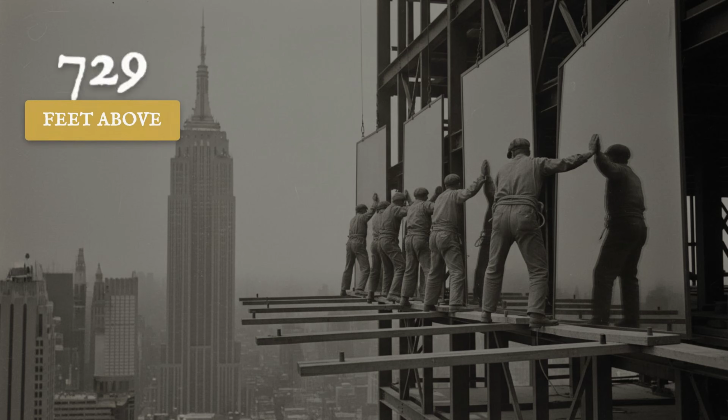In the 1930s New York, men dangled from wooden planks 729 feet above Fifth Avenue, wrestling sheets of glass that weighed more than 2 grown men. A single pane for the Empire State Building's upper floors tipped the scales at 300 pounds, yet the crews hoisting them worked without harnesses, nets, or any equipment we'd recognize as safety gear today. One slip meant a fall through thin air with nothing to break it but the pavement below.

These weren't daredevils seeking thrills, they were window installers, craftsmen whose job demanded they handle fragile, expensive glass in conditions that would paralyze most people with fear. Why did they accept such staggering risk? And how did an entire industry operate this way, one pane at a time, without modern protection? The answer reveals not just courage, but a system where speed, skill, and economics collided at deadly heights.

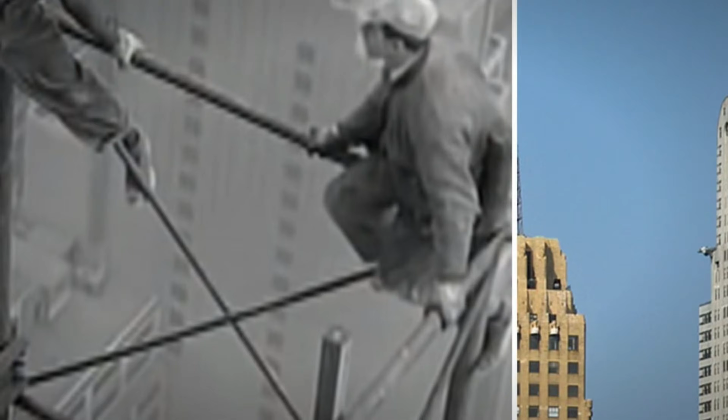The skyscraper boom of the late 1920s and early 1930s transformed American cities into forests of steel and glass. The Empire State Building, completed in 1931, demanded more than 6,500 windows. The Chrysler Building, finished just a year earlier, required thousands more. Each tower represented a new challenge, how to seal buildings against wind and weather while letting in light through enormous expanses of glass. Window installation became its own specialized trade, distinct from the ironworkers who assembled the frames or the masons who laid brick facades.

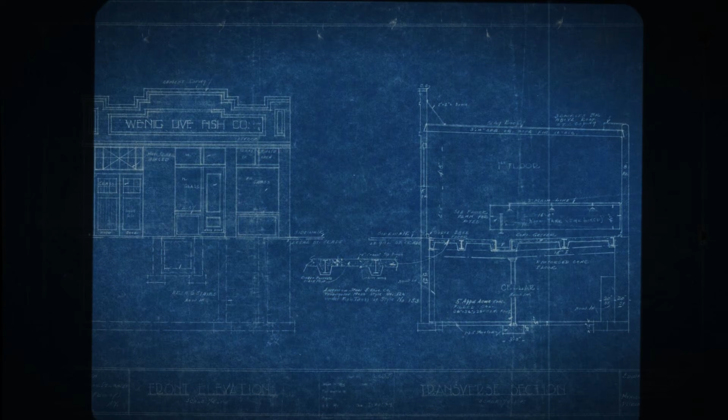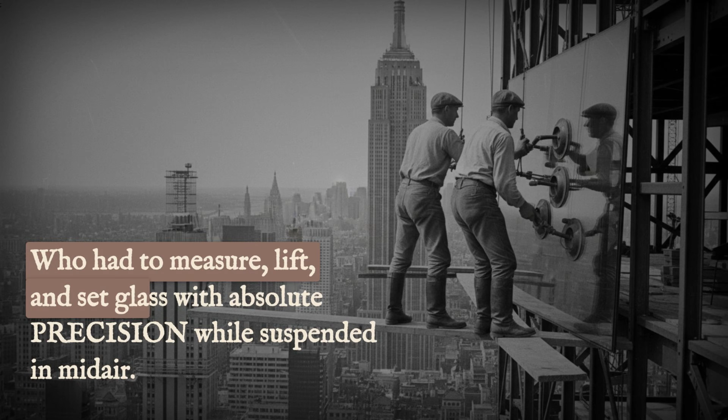These glaziers worked on a precise timeline, moving floor by floor as the steel skeleton rose. Developers pushed for speed. Every day of delay meant lost rental income. Insurance companies demanded weather-tight buildings before winter storms arrived. The pressure funneled down to the men on the planks who had to measure, lift, and set glass with absolute precision while suspended in midair.

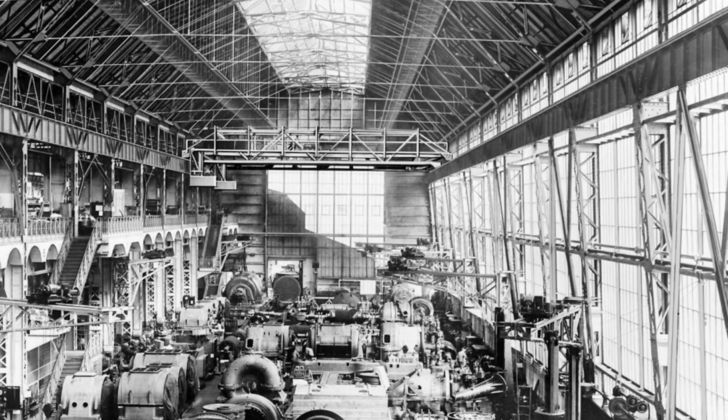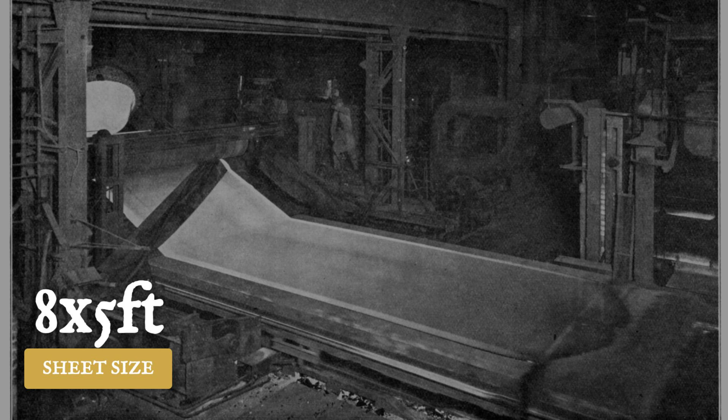The glass itself was revolutionary for its time. Plate glass manufacturing had advanced dramatically since the early 1900s, when most window panes were small and relatively light. By 1930, factories could produce sheets measuring 8 feet tall and 5 feet wide, smooth enough to eliminate distortion and thick enough to withstand wind pressure at extreme heights.

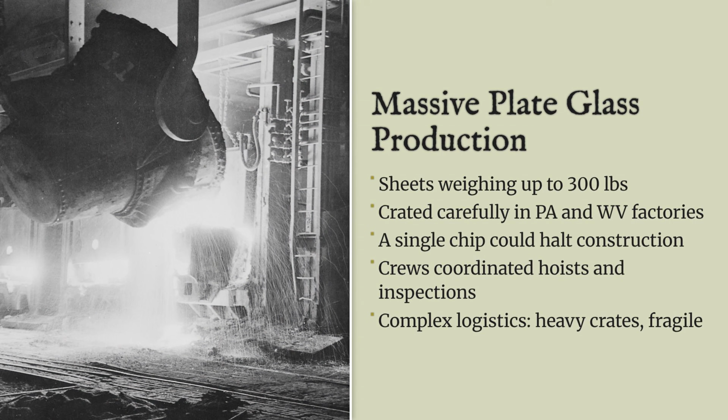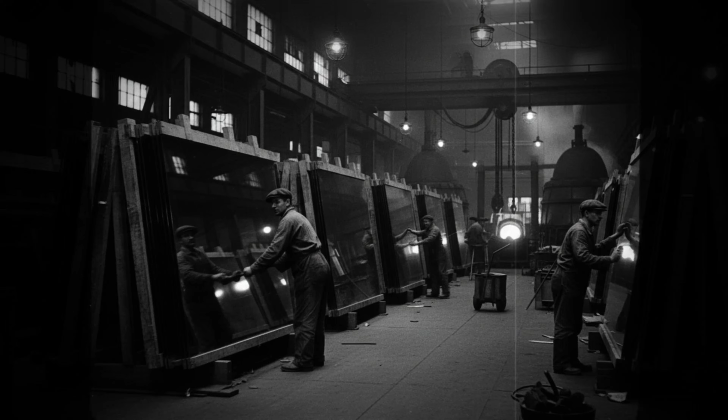The grinding and polishing method produced these massive panes. Molten glass was poured onto large tables, allowed to cool, then ground flat with progressively finer abrasives before final polishing. This process created optically clear glass free from the waves and distortions common in earlier window panes. The factories that supplied New York's building boom operated around the clock, processing sheets that would eventually hang hundreds of feet above city streets. But size came with weight.

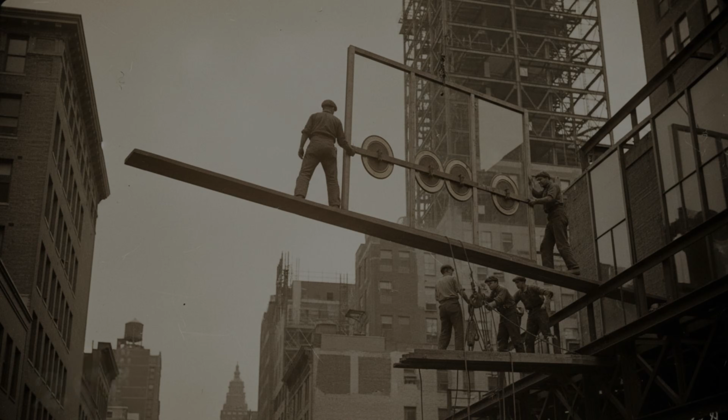A standard office window pane ranged between 250 and 350 pounds, depending on thickness and dimensions. Some specialty panes for lobby windows exceeded 500 pounds. Transport from factory to construction site was its own challenge. Glass couldn't simply be stacked like lumber or bundled like steel beams. Each sheet arrived by truck from Pennsylvania or West Virginia, carefully crated in wooden frames built to precise dimensions and packed with sawdust and straw to cushion against road vibration. A single hard jolt could crack multiple panes, turning a profitable delivery into a total loss. Trucks carrying glass moved slowly, avoiding rough roads and sudden stops.

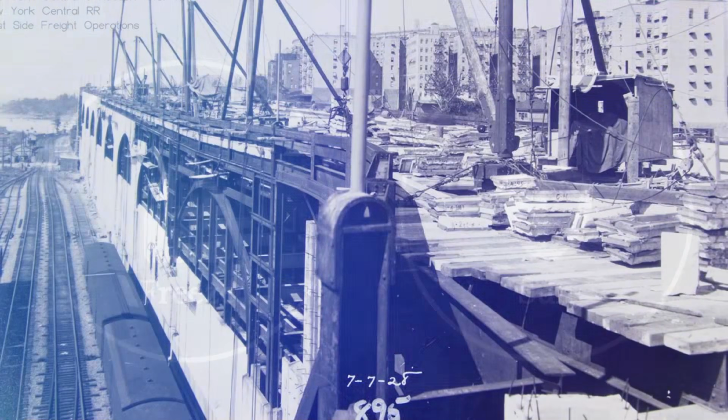At the construction site, storage demanded equal care. Rain could seep into crates and cause spotting, freezing temperatures could crack panes through expansion of trapped moisture, and direct sunlight could overheat glass stored in tight packing. Large projects required dedicated ground floor storage spaces where glass could be kept dry and accessible for hoisting. Workers uncrated each sheet on site, inspecting for cracks or flaws that could cause it to shatter under stress. A single damaged pane discovered after installation could mean dismantling scaffolding and repeating hours of work.

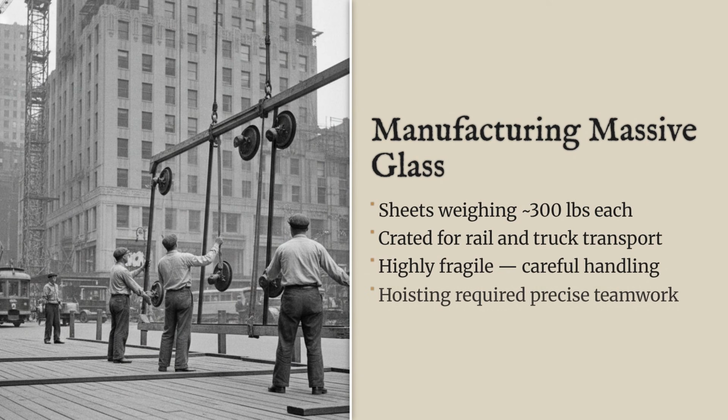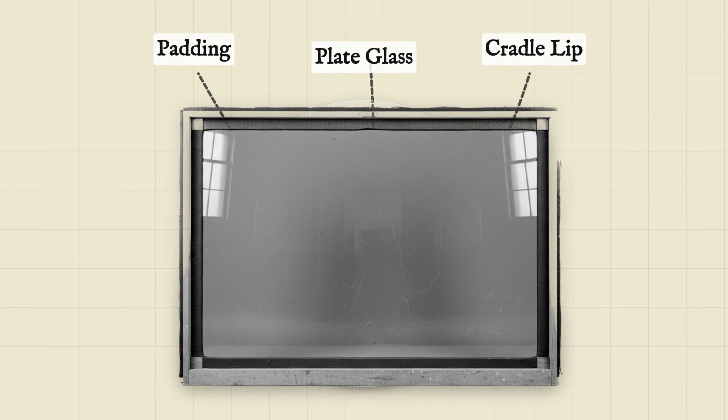Moving these massive sheets required coordination between ground crews, hoist operators, and the glaziers themselves. Hoists lifted the glass from street to working floor, threading between steel beams and temporary construction platforms. Unlike steel beams, which could be dropped a few inches without catastrophic damage, these massive panes demanded gentleness at every stage. The panes rode in wooden cradles with padded edges designed to cushion them against sudden movements. Hoist operators, using the same steam-powered derricks that lifted steel, learned to start and stop gradually, avoiding the sudden jerks acceptable when moving iron.

Signalmen directed each lift with hand gestures, but with even less margin for error. A swinging load could crack a pane worth several weeks of a worker's wages. At the installation floor, the real challenge began.

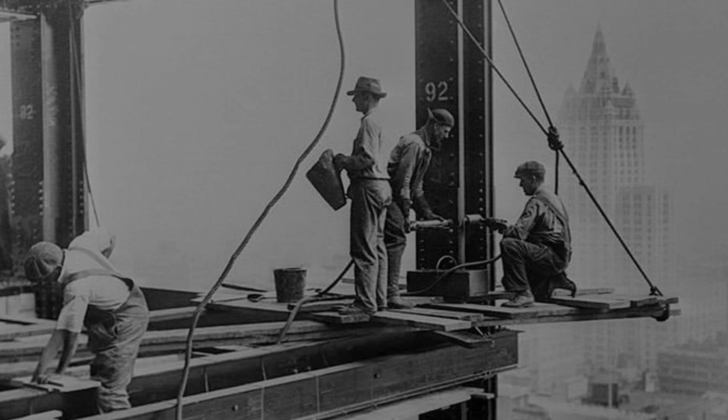Glaziers worked from wooden planks suspended by ropes or cables, positioned just outside the building's frame. These planks, called scaffolds, measured roughly 2 feet wide and extended 12 to 16 feet in length. Multiple planks would be lashed together to create a working platform along an entire floor's perimeter.

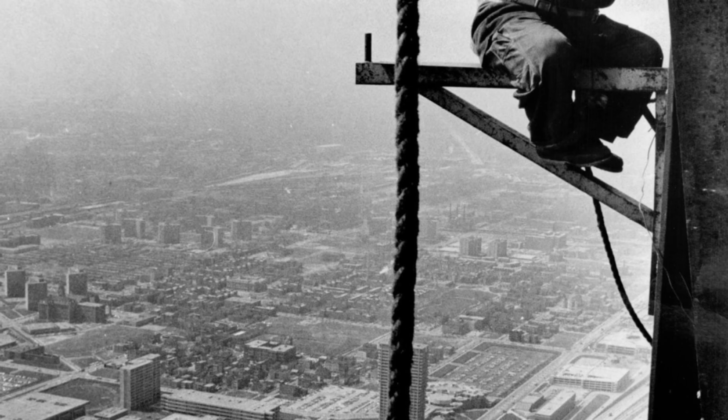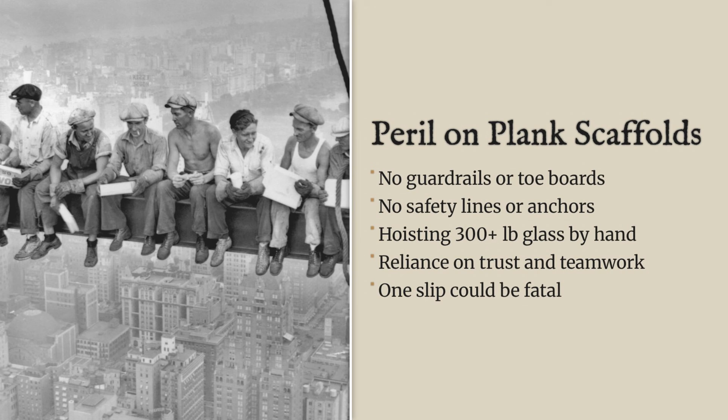The scaffold hung from the steel frame above, secured by rope loops tied around beams or hooked to temporary anchor points. There were no guardrails, no toe boards to prevent tools from rolling off, and no safety lines connecting workers to anything solid. The scaffold system evolved as buildings grew taller and construction companies learned from accidents.

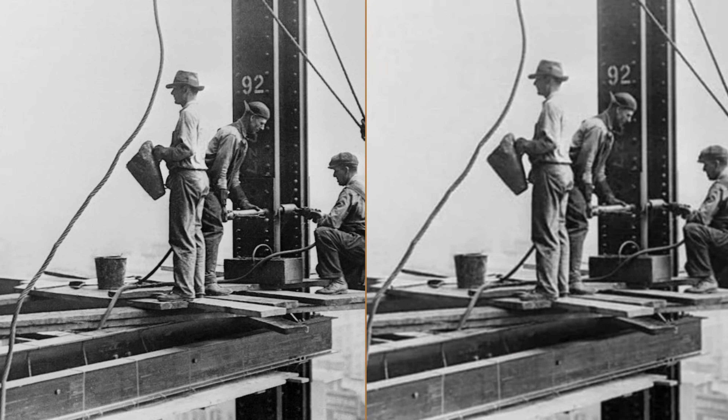Early scaffolds were simply wooden planks roped to whatever anchor point was convenient. By 1930, some contractors used wire cable instead of hemp rope, improving strength and reliability. Metal brackets bolted to the building's frame provided more secure anchor points than rope loops, though installation still depended on the skill and judgment of the rigging crew.

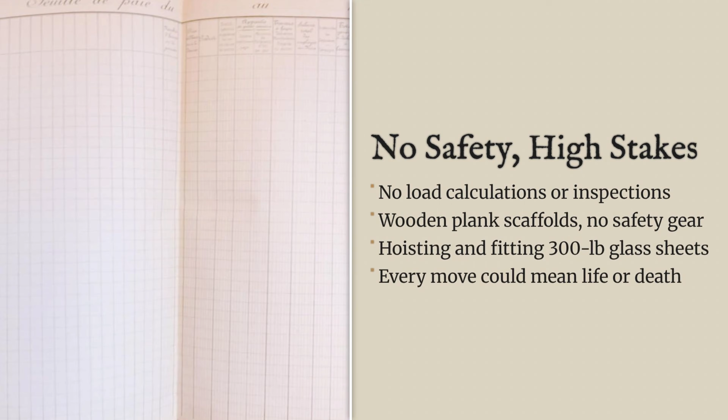Despite these improvements, the scaffolds remained fundamentally temporary structures with minimal engineering. There were no load calculations, no inspection requirements, and no standards for how much weight a given setup could safely hold. A typical scaffold might support 3 workers, their tools, and a massive pane, easily exceeding half a ton of total load. The anchor points had to hold all this weight, plus the dynamic forces of men moving around and wind pushing against the structure.

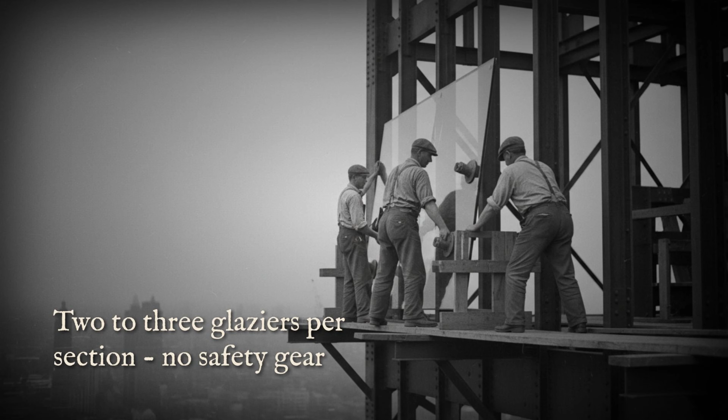2 or 3 glaziers typically worked together on each section, with one man acting as the lead installer and the others assisting with positioning and securing the glass. They wore leather gloves to protect their hands from sharp edges, but the gloves had to be thin enough to maintain grip and feel. Heavy winter gloves were too clumsy for the fine adjustments needed to seat a pane properly in its frame. Canvas aprons protected clothing and provided pockets for tools, such as putty knives, glazing points, and small hammers, but offered no protection in a fall.

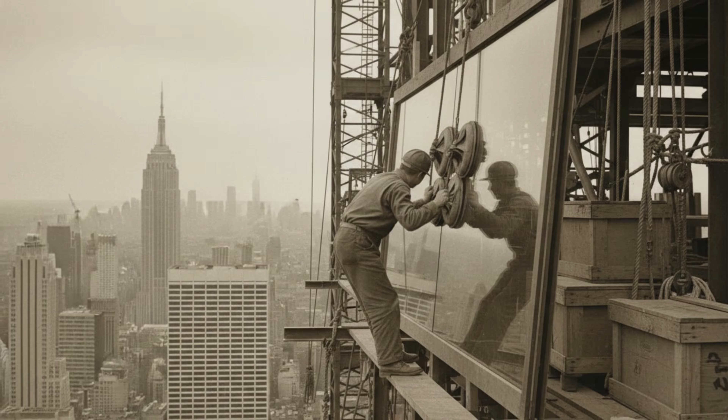The technique for lifting and setting a pane was part strength, part leverage, and part timing. The glass arrived at the scaffold's edge in its wooden cradle, positioned by the hoist crew. The glaziers would grip the sheet by its edges, using suction cups in some cases for the largest panes. These cups, made of leather or rubber with hand pumps to create vacuum, gave the men something to hold beyond just the glass edge itself. But suction cups could fail if the glass was wet, dirty, or if the seal broke under strain.

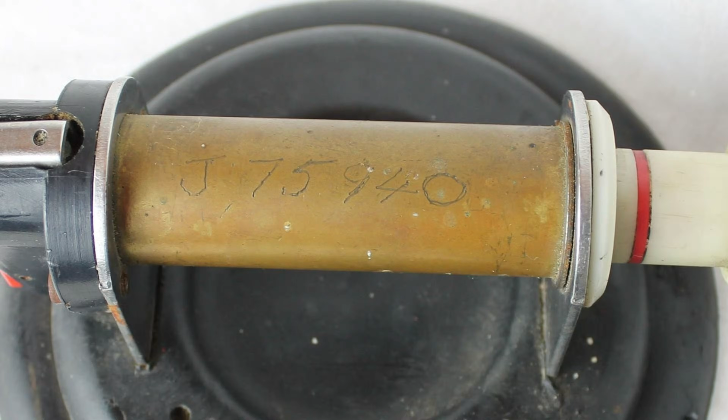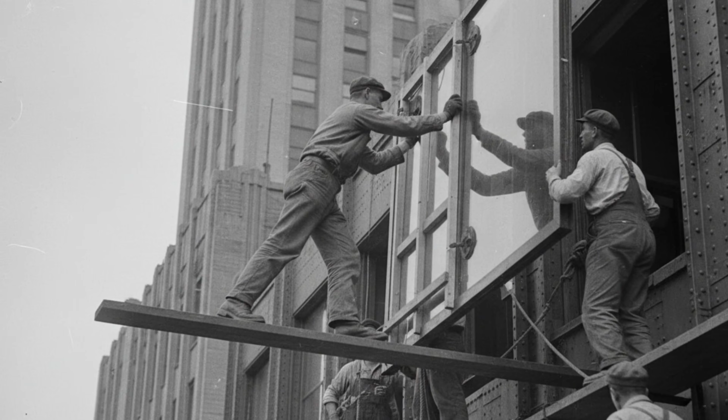Working together, the crew would tilt the pane upright, pivoting it on one edge while supporting it from multiple points. The lead glazier positioned himself at what would become the top of the window once installed, while his partners steadied the bottom and sides. They moved in unison, walking the glass across the scaffold toward the window opening. Every step had to be coordinated. One man moving too quickly or losing his grip could send the pane crashing down, or worse, toppling sideways and taking the whole crew with it off the plank.

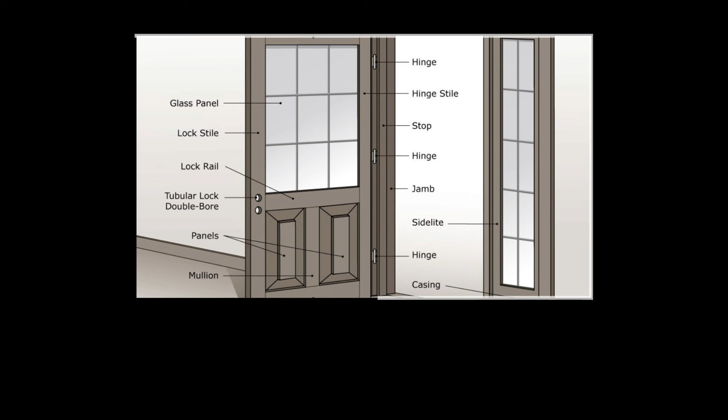Once positioned at the window opening, the real test of skill began. The steel frame around each window had been set with precise measurements, but construction tolerances meant that every opening was slightly different. The glaziers had to ease the heavy sheet into the frame's rabbets, the L-shaped grooves that would hold the glass, while checking for fit on all 4 sides. Too tight and the glass would bind or crack under pressure. Too loose and wind would whistle through gaps, or worse, the pane could work free and fall.

The crew tilted the glass to slide the top edge in first, then carefully lowered it into place, checking alignment as they went. One man held the full weight at an angle while another tapped the bottom edge with a rubber mallet, adjusting position by fractions of an inch. A third worker might be reaching around the frame from inside the building, ready to place temporary wooden wedges to hold the glass once it's seated properly. The entire operation happened while balanced on a 2-foot-wide plank with nothing between the workers and a fatal drop.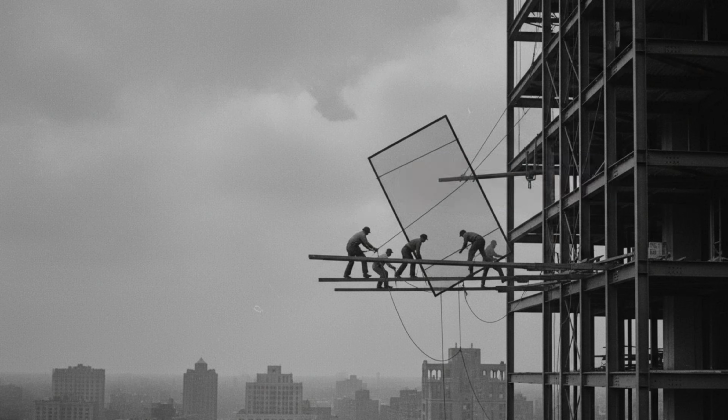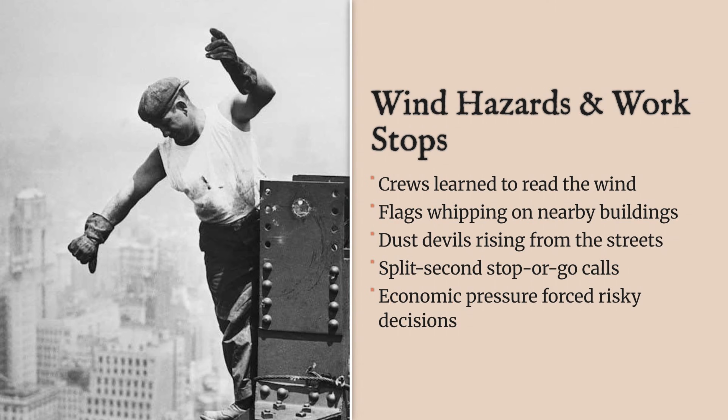Wind was the constant enemy. At heights above 500 feet, gusts could reach 40 miles per hour on an otherwise calm day. A sudden blast could catch a pane being maneuvered into place, turning it into a sail that either shattered against the frame or pulled the workers off balance. Crews learned to read the wind, watching for telltale signs, flags whipping on nearby buildings, dust devils rising from the streets below, or the feel of pressure building before a gust hit.

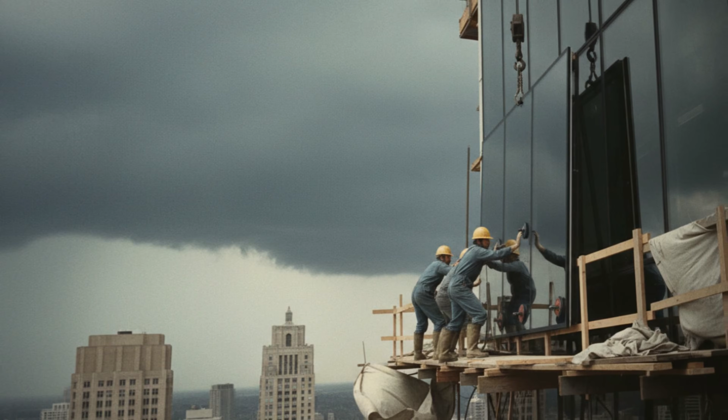On particularly windy days, work stopped. Foremen made the call, weighing the cost of delays against the certainty of damaged glass and injured men. But the pressure to keep moving was intense. Contractors faced penalties for late completion, and those costs cascaded down to the workers in the form of reduced hours or outright layoffs. Some crews took chances they knew were foolish, gambling that they could set just one more pane before the weather turned worse.

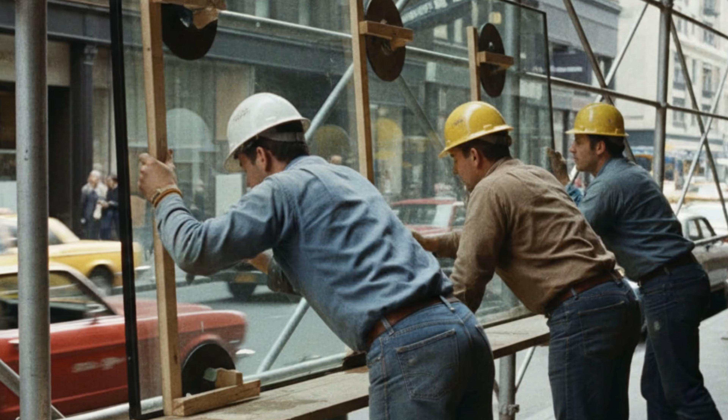Once a pane was seated in its frame, the securing process began. Glazing points, small triangular pieces of metal, were driven into the wooden frame around the glass perimeter, holding it in place while glazing compound cured. The compound, a putty-like mixture of linseed oil and chalk, was worked into the gap between glass and frame with putty knives, creating a weather-tight seal. This finishing work required reaching around the glass from the outside, often while leaning far out over the plank to reach the frame's edges.

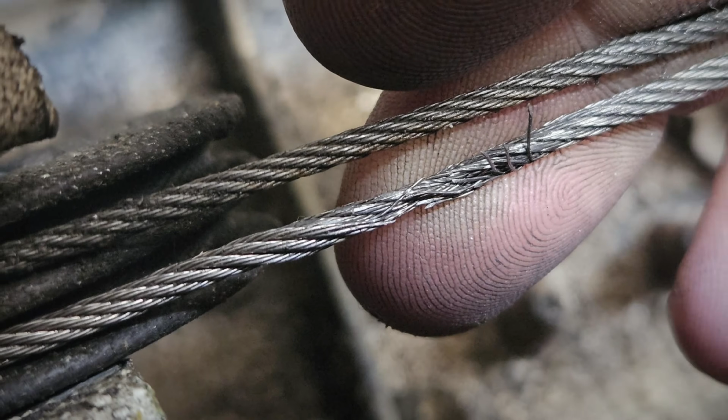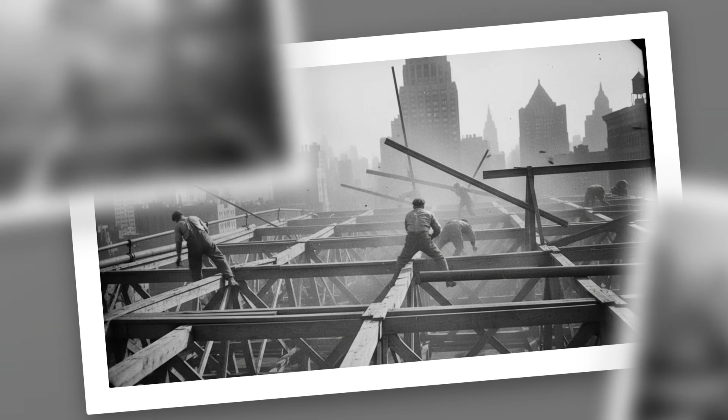Rigging failures killed workers regularly. A rope frayed by rubbing against a steel edge could part without warning. An anchor bolt over-torqued during installation might crack the steel beneath, creating a hidden weakness that gave way under load days later. Some failures were catastrophic, with entire scaffold sections dropping and taking everyone on them to their deaths. Others were near misses, planks tilting suddenly, dumping tools and materials while workers clung to ropes or grabbed for the building frame.

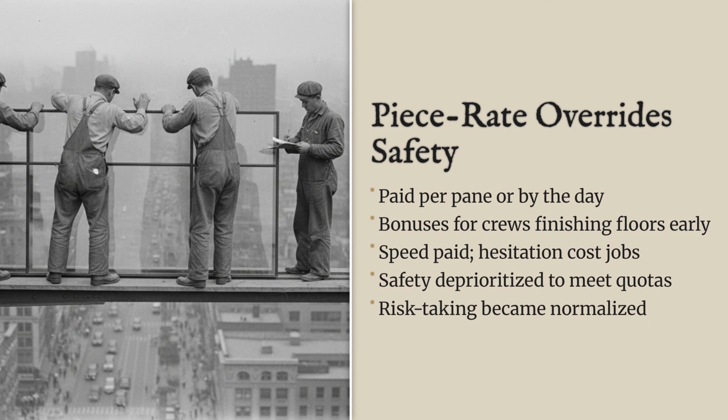The economics of window installation created pressure that overwhelmed caution. Glaziers were typically paid by the pane or by the day, with bonuses for crews that completed floors ahead of schedule. This piece rate system incentivized speed over safety. A crew that took time to double-check rigging or wait out marginal weather earned less than one willing to push through. The men who hesitated, who voiced concerns about conditions, often found themselves passed over for the most lucrative jobs.

Insurance existed but barely covered the risks. Workers' compensation laws varied by state, and in many jurisdictions, death benefits for a fallen worker amounted to a few thousand dollars at most, perhaps $3,000 to $5,000 in 1930s currency, equivalent to roughly $50,000 to $85,000 today. For families left behind, this was a catastrophic shortfall, barely enough to cover funeral costs and a few months of lost income. The companies that employed these men carried liability insurance, but the premiums were calculated based on accident rates that everyone accepted as normal.

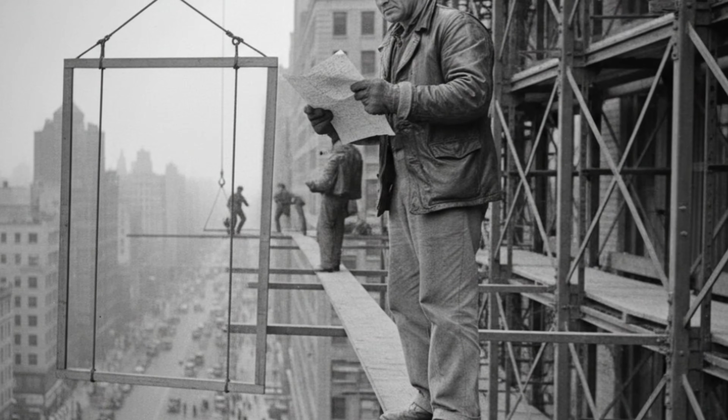The culture among glaziers mirrored that of ironworkers and steeplejacks, a complex mix of pride, fatalism, and dark humor. Men joked about their work being a pain in the glass, while acknowledging that every day could be their last. They developed superstitions and rituals, never starting a difficult installation on Friday the 13th, always checking equipment in the same order, refusing to work with anyone who seemed nervous or distracted. These informal rules created a sense of control in a fundamentally uncontrollable environment.

Even when basic safety belts became available in the 1930s, most glaziers refused to wear them. The belts were heavy, uncomfortable, and restrictive, making the precise movements of window installation harder. The thick leather clamped down on the waist and pinched at the hips, interfering with the hip rotation and body positioning needed to maneuver heavy glass.

The best glaziers, the ones who commanded top pay and led the most prestigious jobs, worked with apparent ease at deadly heights. They moved confidently, handled enormous panes with casual grace, and finished installations faster than crews who proceeded more cautiously. Their example set the standard that everyone else tried to match, regardless of their own comfort level with the risk. A man who needed a belt to keep him on the scaffold was a man who didn't belong there.

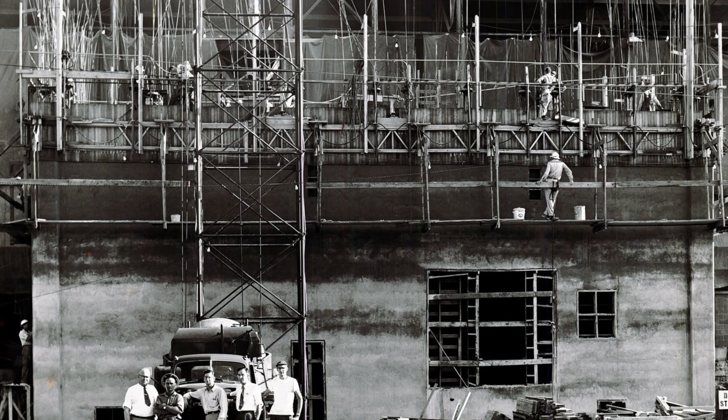Apprentices learned the trade through observation and experience, not formal training. A young man might start as a ground crew member, handling glass deliveries and watching the installation crews work from below. If he showed aptitude and courage, he'd be invited to try working on the scaffold, first on lower floors where a fall might only break bones rather than guarantee death. Those who proved themselves steady moved up to the high work, where pay was better and respect was earned through demonstrated skill.

Falls were common enough that every crew had stories. A man's boot slipping on a wet plank, a sudden gust catching him off balance, a rope anchor giving way. These weren't rare events but accepted hazards of the trade. Some men survived falls through sheer luck, landing on lower scaffolds or catching a beam on the way down. Others weren't found until the end of the workday, their bodies discovered where they'd landed in alleys or on rooftops below. Newspapers reported the most dramatic accidents but ignored the routine deaths that happened out of public view.

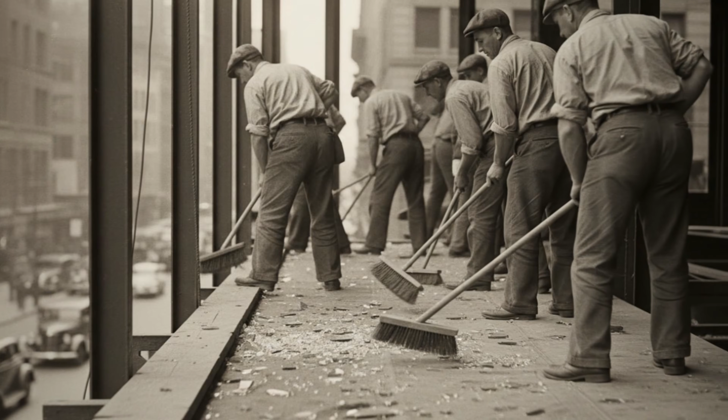Despite all precautions, broken glass was a constant expense. Industry estimates suggested that 5 to 10% of all glass delivered to a major construction site would be damaged or destroyed before successful installation. Some broke during transport, some during hoisting, and some shattered when workers attempted to fit them into frames that had been measured incorrectly or had shifted as the building settled. The cost of these losses was built into project bids, but that didn't make them less frustrating for the crews who had to handle the same pane multiple times or deal with cleanup of shattered glass raining down from scaffolds.

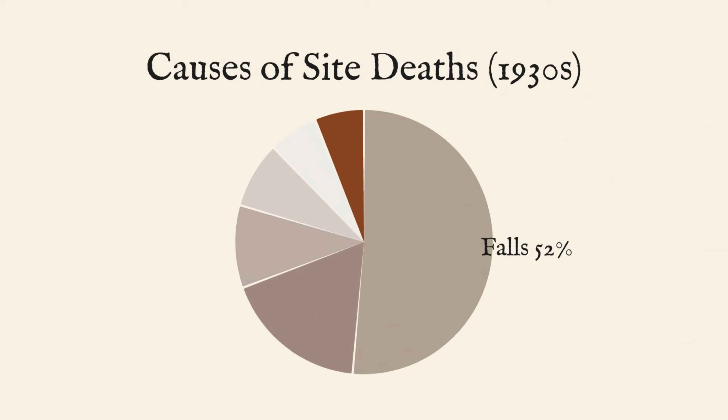The human toll was harder to quantify, but impossible to ignore. While comprehensive statistics from the 1930s don't exist, construction death rates from that era paint a grim picture. Falls from height were the leading cause of death on construction sites, and window installation ranked among the most dangerous specialties. The informal calculation accepted by many contractors, one fatality per $1 million spent, reflected an industry that had normalized preventable deaths as simply the cost of building skyward.

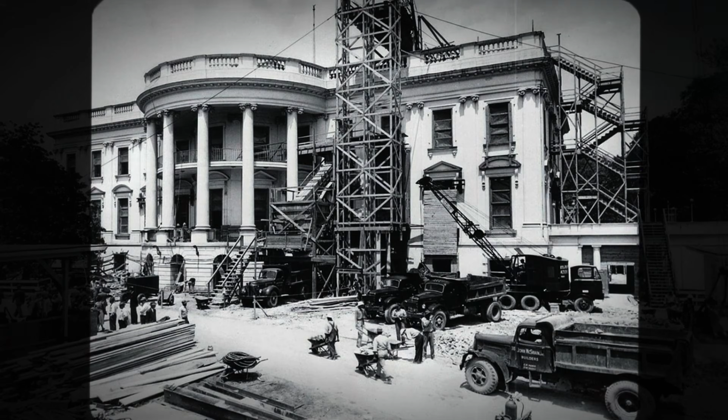The transition towards safer practices began slowly in the late 1930s and accelerated after World War II. The development of lighter, stronger materials for rigging, steel cable, aluminum brackets, synthetic ropes, made scaffolds more reliable. The introduction of motorized hoists with better control systems reduced accidents during lifting. But the biggest change was cultural, driven by union pressure and eventually by regulation. Workers began demanding better protection, and companies that resisted found themselves unable to recruit skilled crews.

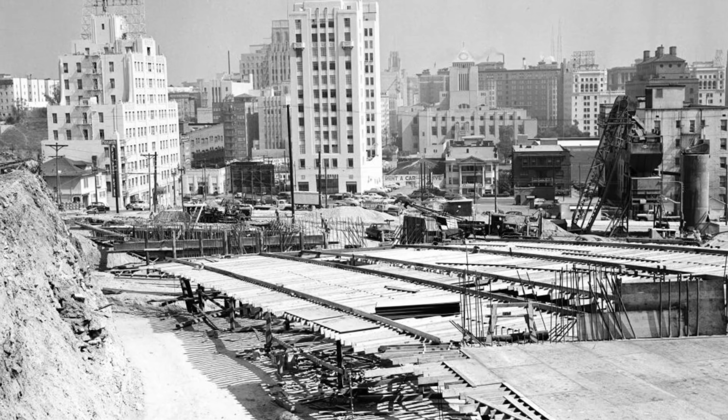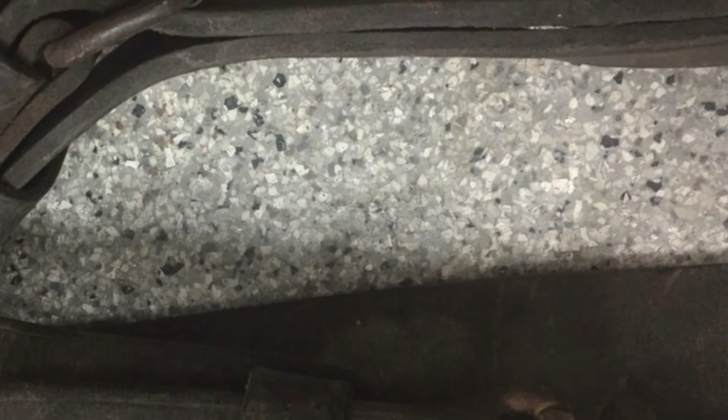Unions pushed for basic protections throughout the 1940s and 1950s, winning incremental improvements in equipment and working conditions. But comprehensive federal oversight didn't arrive until 1971, when the Occupational Safety and Health Administration brought sweeping changes to construction sites nationwide. OSHA's standards required fall protection for any work above 6 feet, mandated inspections of rigging and scaffolding, and imposed penalties severe enough to change industry behavior fundamentally.

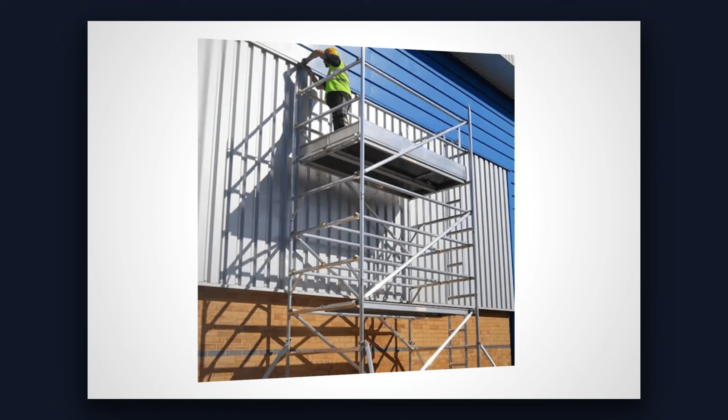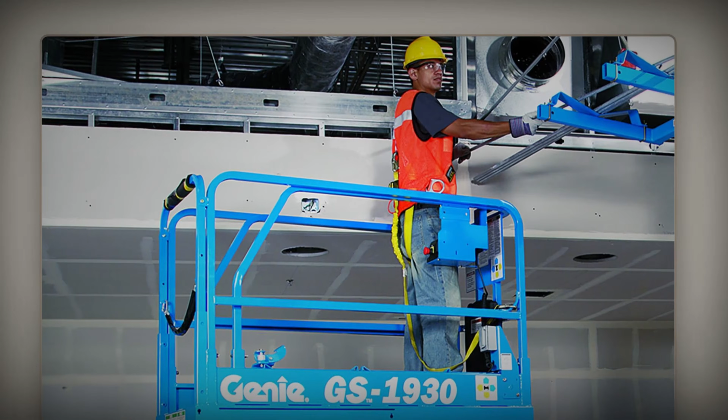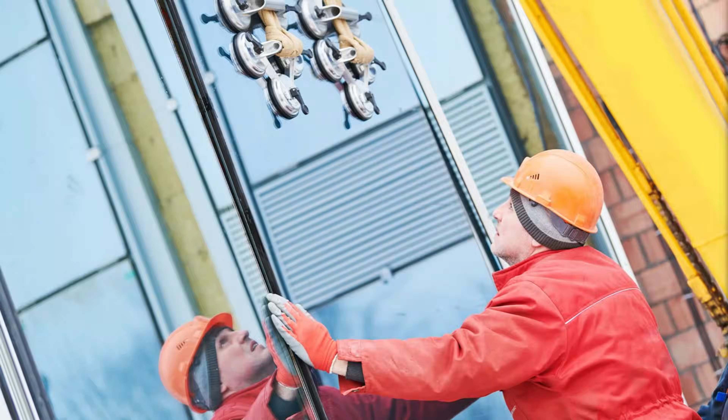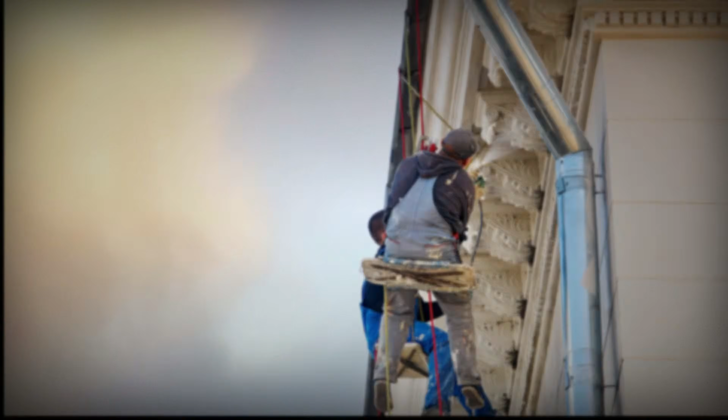Yet the fundamental challenge remains: installing fragile, expensive glass at dangerous heights while maintaining precision and speed. What's changed is the recognition that accepting routine deaths as the price of progress was never necessary, only convenient for those who prioritize schedules and budgets over human life. Each regulation, each piece of modern safety equipment, traces its origin to workers who died doing jobs that could have been made safer with existing technology and knowledge.

The buildings themselves remain, their windows still catching light above the streets where men once risked everything to install them. The Empire State Building's facade, the Chrysler Building's gleaming crown, the countless other towers from that era, each pane of glass is a testament to skill and courage, but also to a system that accepted deadly risk as normal.

Today's safety standards emerged from lessons written in those earlier workers' blood, each regulation a response to deaths that should have been prevented. The glaziers who worked without nets or harnesses weren't heroes or fools. They were craftsmen doing what their industry demanded in an era that valued speed and economy over human life. Their legacy isn't just the skylines they created, but the reforms their sacrifices finally forced into being.